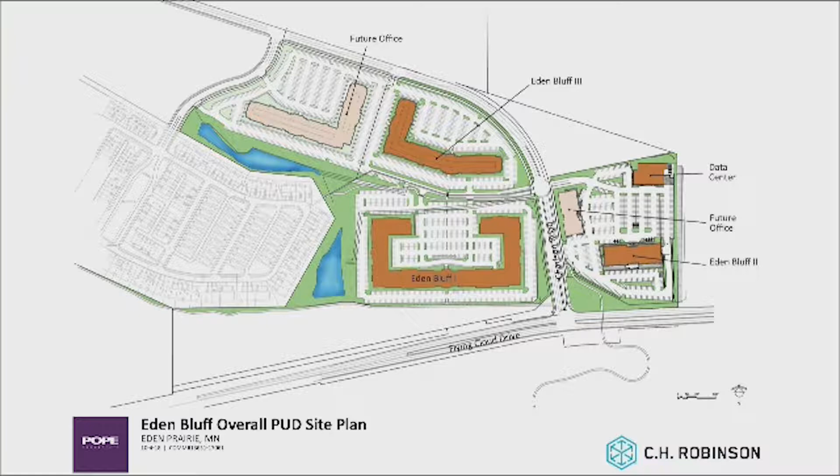Back in 2017, actually in 2016, we were asked by C.H. Robinson to begin the process of looking at that site to see if it would be possible to build surface parking that could support their densification of their existing buildings and ward off the need to build another building.

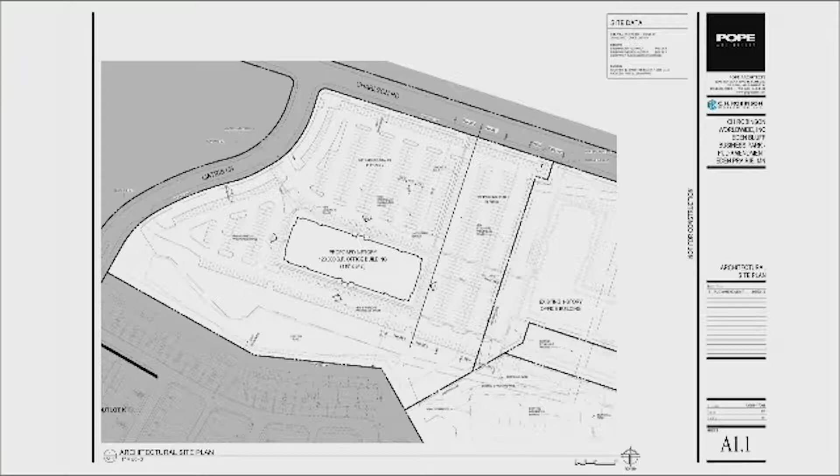In order to accomplish that, we took the 82,000 square foot single-story building and began to stack it. We came back with a plan that would be a 3-story building, about 40,000 square feet, 3 stories high. We took this to a neighborhood meeting and did receive some significant pushback, both on the height of the building as well as concerns about traffic.

And so we went back to the drawing board. Oh, and about that height I mentioned — this is the height of that 3-story building. It was about 42 feet.

We went back and came back with a 2-story building, and that's what we have today that we're seeking approval for. It is an 80,000 square foot 2-story building, expandable in a subsequent phase to 120,000 square feet, adding another 20,000 square feet per floor. It affords the opportunity for C.H. Robinson to build 175 surface parking spaces initially, provided the variance is granted that allows surface parking to be constructed on the lot without the building. And that in turn allows them to forestall the building of the new building, which is the point.

This has been modified both by feedback from the neighborhood and by the results of the traffic study. The traffic study specifically suggested that one of the 2 exits out onto Liatris be eliminated and that the second become right-out only, and we've made that adjustment. It also recommended that the shared drive out into Charlson have 2 exits, one dedicated left turn and one dedicated right turn, and we've added that exit as well. So we're trying to make those traffic modifications in line with the traffic study.

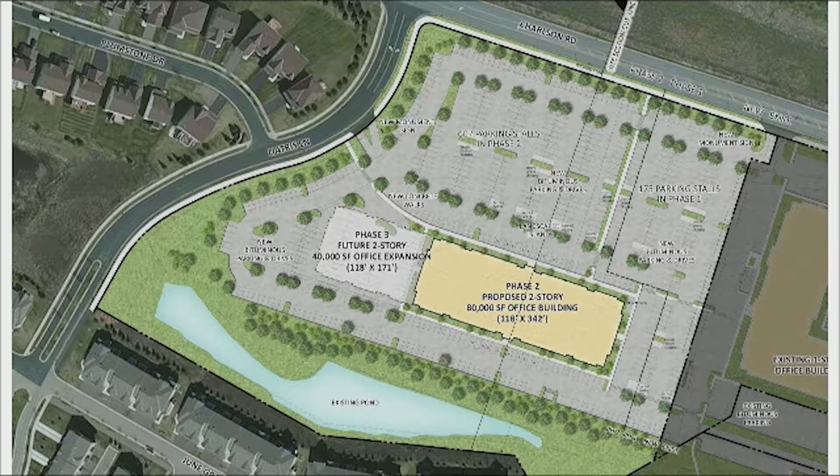After the Planning Commission meeting the other evening, we also went back and added sustainable features to the site, including dedicated carpool parking, dedicated parking for electric cars, and the pedestrian connections that are there as well.

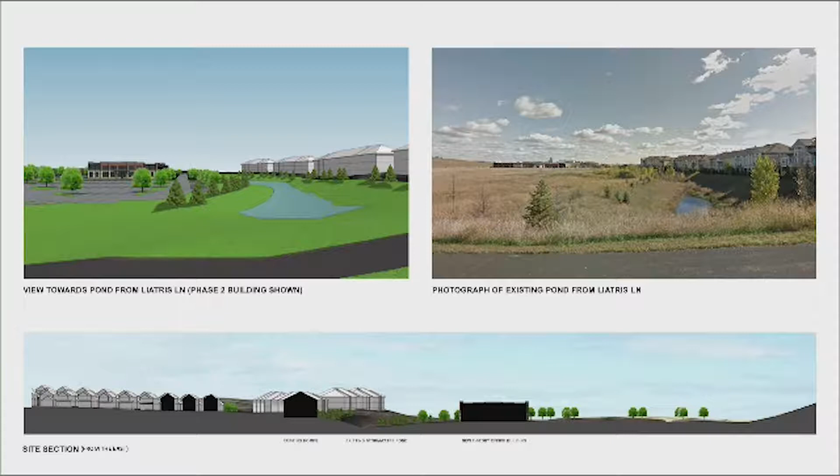So in a single-story configuration, a great deal of roof would have been visible. And in that way, we think there's an advantage here because we're compressing the building area, allowing less view of roof, more view of building, and more view past it as well.

The landscape plan, this is grading and utilities, has been submitted. I won't go into detail on this, but I can answer questions if you have them as we move forward.

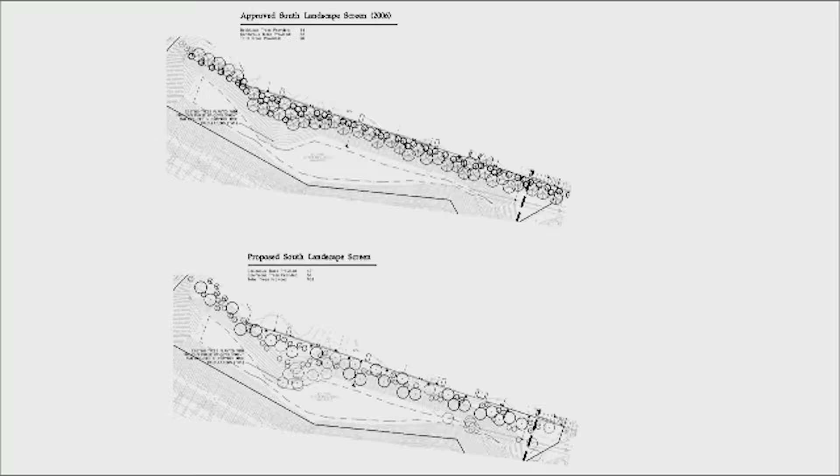This is the planting plan. For the first phase that provides screening from the townhomes, there was a planting plan approved in 2006. Westwood, our civil engineer on this, went in and did a tree inventory to confirm which of those plantings had survived since 2006, and then put together a phase 1 planting plan.

This is the phase 1 parking. It plants a screen around the parking, but also plants screening materials that will have time to grow between now and when that building is eventually built, to provide better screening. So those are happening along the southern border there.

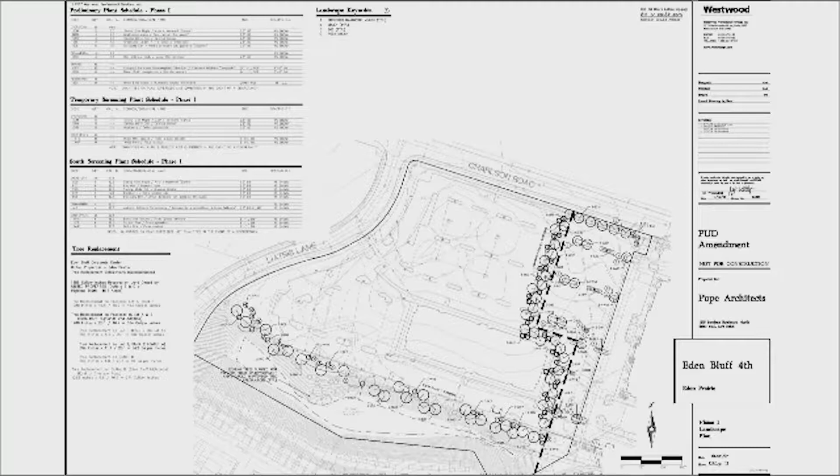As the city report points out, there are more trees being planted than were previously approved and more trees being planted than are required. Part of that strategy is just to ensure survivability, planting a few extra trees in order to make that happen.

Quick question on that: is there a lot of evergreen type trees in there as well? There is, yes. I have specific counts, but they're about half evergreen, I believe, and half deciduous trees. All right, thank you.

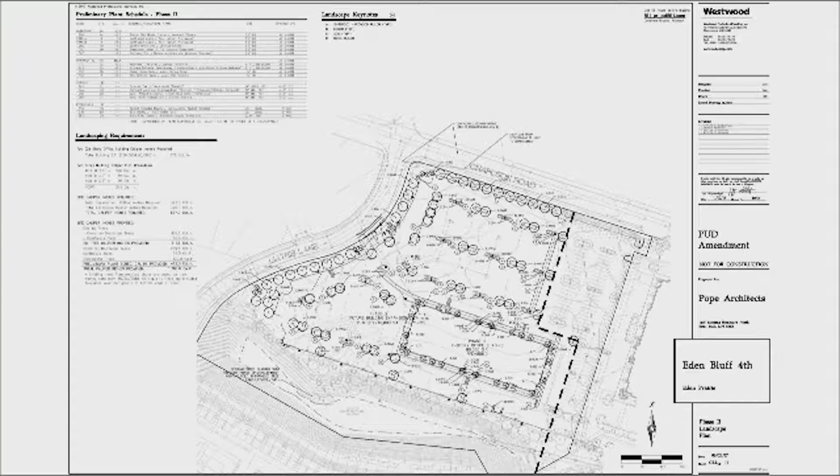This is the phase 2 landscape plan. You see it fills in the trees on all the parking islands and the shrubs, and then creates a screen against Liatris as well.

That's the information we have. I should say that there was considerable conversation about traffic and safety in the Planning Commission meeting, and we had relied on a traffic study.

One of the pushbacks and concerns expressed was that the data for the traffic study was taken in August of 2017, a month when many are on vacation. I talked with the traffic engineer, and they had not made a specific adjustment for that, because this project is not necessarily near a school building, and they would otherwise make that adjustment.

But we don't think it's unreasonable to have to renew the traffic study prior to a building permit being pulled, particularly since that may be years down the road. And there may be things that can reasonably be done in addition to what we're already doing to limit the effect of traffic. So glad to answer any questions you may have.

Any questions? Councilmember Nelson: your main parking lot goes out into Charlson, it looks like, from the overview. Is that correct? There's one exit out onto Liatris and one onto Charlson, and then the other one would go back to the south to the intersection when you first come off Flying Cloud Drive and make a left there off Charlson.

Why not put the access to the parking lots both on Charlson? One is down past the curve and the other would be straight, instead of just going out a few feet from the, I assume there's a stop sign there, maybe there isn't, I didn't drive it. But you wouldn't be that far, and you wouldn't be going onto Liatris, you'd just be going out into Charlson where the cars are going to dump out onto almost immediately anyway.

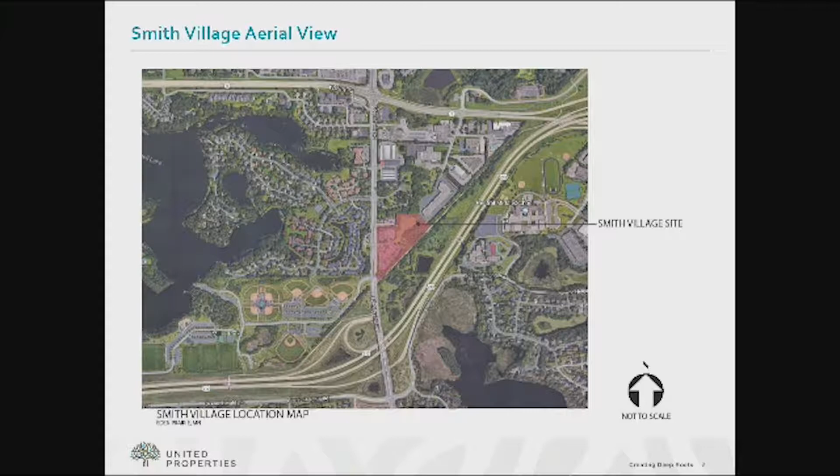So this site is highlighted here in red on the aerial. Just a very well located site that we are excited about because of the regional trail, access to Miller Park, and easy access to both Highway 212 and Highway 5.

As Mr. Getchell said, we are proposing a new neighborhood here at Resurrection Life Church as a redevelopment of both the church site and the vacant lot they currently own. The site plan shows we are creating a new neighborhood with 164 homes. The cooperative is the C-shaped building to the east, the Trail Ridge Apartments are parallel to Eden Prairie Road, and the townhomes are in the middle.

We really believe we are creating a multi-generational situation here with mixed ages. We've got varied product types for sale and rental, with nice broad market appeal for different homes. We're going to range from about 750 square feet up to over 3,200 square feet in the walkout townhomes, and we're proposing a variety of amenities and connectivity to the neighborhood.

Access to this entire new neighborhood would be off of Glory Lane, a private road off of Eden Prairie Road, currently between Resurrection Church and Huber Funeral Home. I'll walk through a few more details of each component that were a little more easily seen on the overhead.

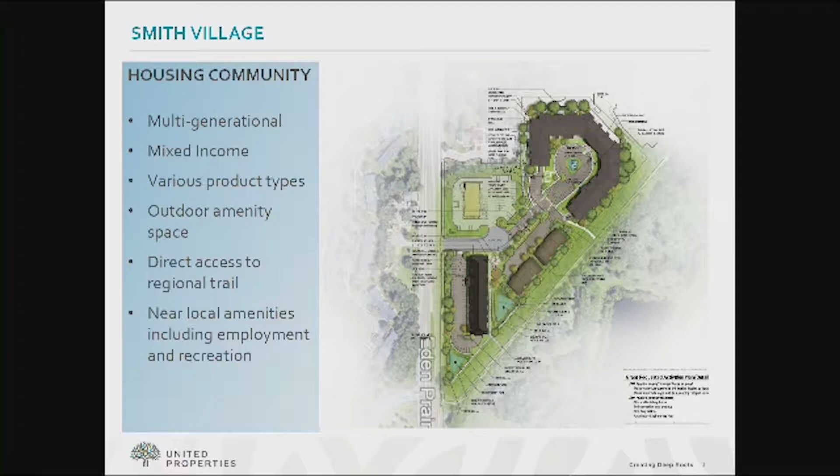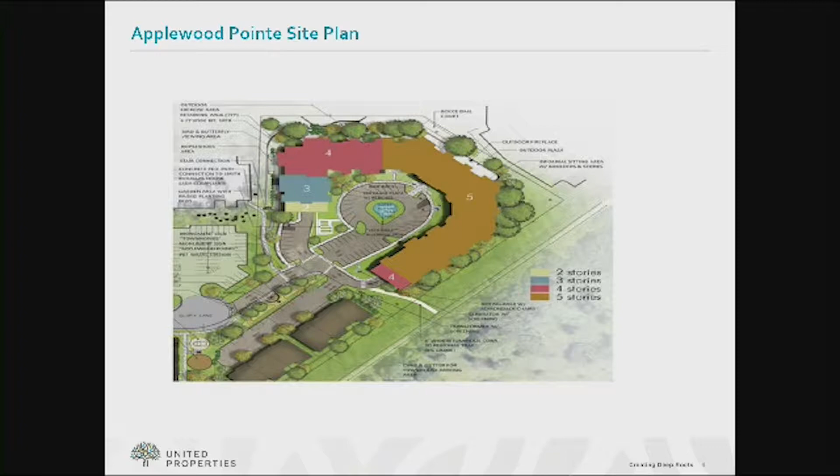We've got garden areas, a little water feature in front, and many common areas on the site. The next slide here is just a view of that tiered view at the entry.

On the left-hand side, the building steps up from 2 and 3 to 4 and 5 stories on the elevation. The cooperative has 100 homes, and we are proposing that 10 of those, or 10%, will qualify for varying area median income qualifications. The homes will range from about 1,100 to over 1,900 square feet, all 2 bedrooms, with most having an additional den. As Mr. Getchell said, it's a senior 62-and-older independent cooperative, with an average age likely close to 70.

The next photo is a rendering of that short section, a view from the Smith House parking lot. We will be adding plenty of vegetation in addition to tiering the building there to limit visibility.

Is this existing vegetation? No, this will be proposed. There are some trees there that we can save, but most of it will have to be new planted.

So what size trees are you planting? If we're able to put in spade-dug trees, about 12 to 16 feet, that's what we'll try to do. We may come back to staff and work potentially to do that on some of the parking buffer between our lot line and the parking lots, so some might come onto the Smith property, just because of the slopes there. Smith is actually up higher than our site, so we have to deal with some grades. But we're happy to do as much screening as we're able.

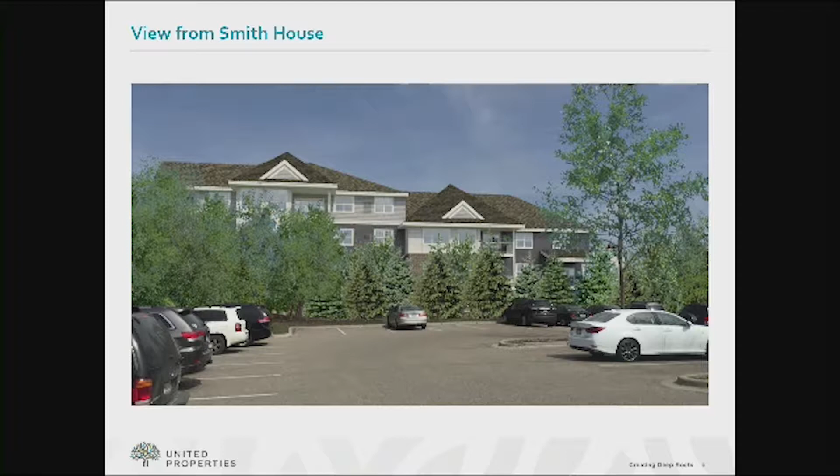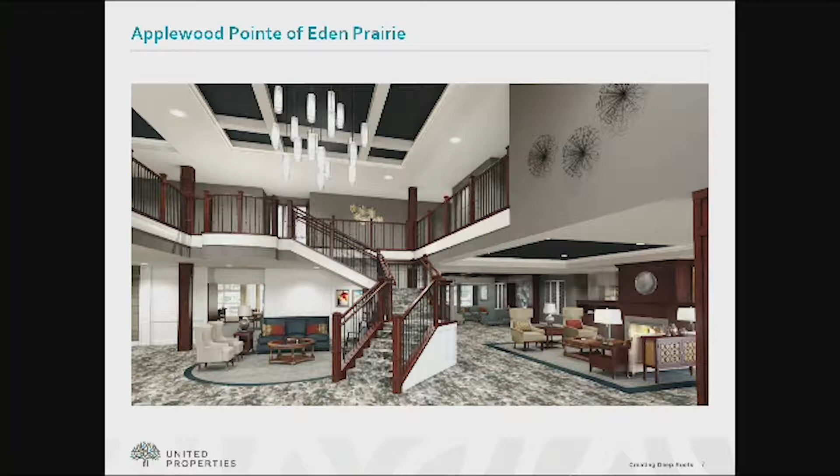The next slide is a quick shot of a potential interior, showing that the cooperative has a very broad range of amenities within the building. This is our two-story lobby, with a great room, a parlor, a club room, fitness center, library, both crafts and hobby shops, and a car wash in the garage.

The next slide takes a closer look at the remaining part of the site, where the 6 townhomes and 58 apartments are, with access off of Glory Lane. We've combined a lot of the green area and entry features in the center, sharing a public space with public art, a sitting area, and a green rain garden area. You'll see a play area and sport court adjacent to the Trail Ridge apartments, and a secondary access from that building to that area, away from the parking, with connectivity both within the site and to the proposed regional trail.

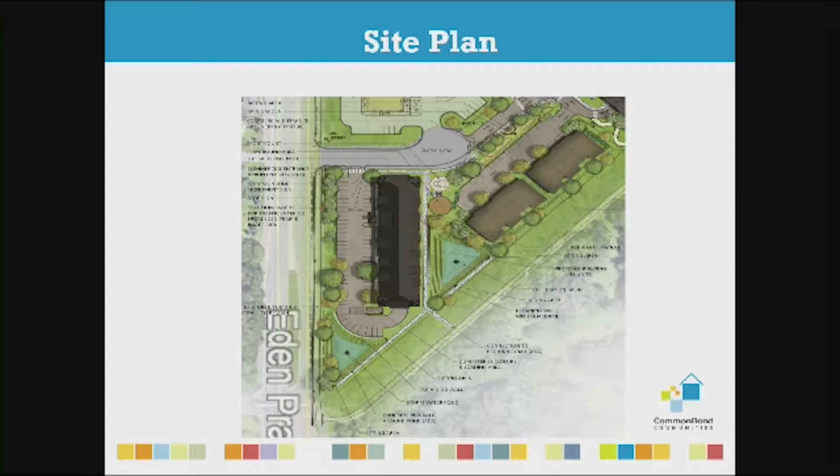A few ideas about what those items might look like are here, anywhere from raised garden areas to public art and playgrounds and activities that we will be adding across the entire site combined.

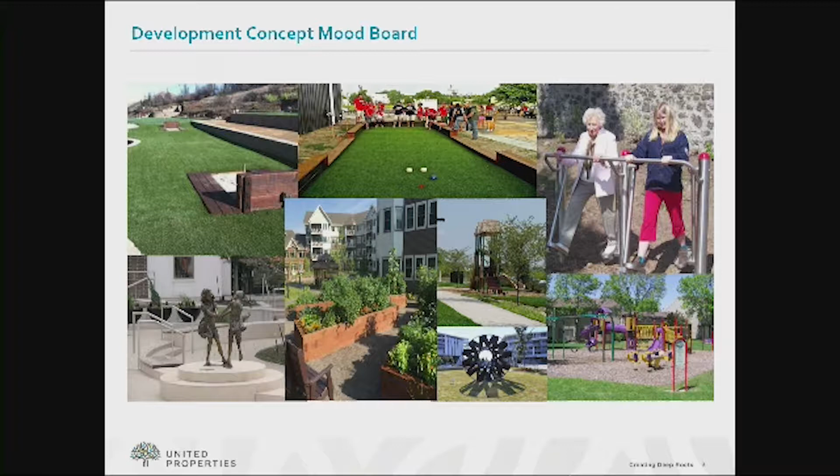So those are not determined? None of that is determined yet? You just plan to maybe do something like that? No, quite a few of these things are determined. We are planning on having an area with public art, we do have the raised gardens, and we will have a playground area. Some of the activities, whether it's bocce ball or other athletic facilities around the cooperative, are still to be determined. Okay, correct. Thank you.

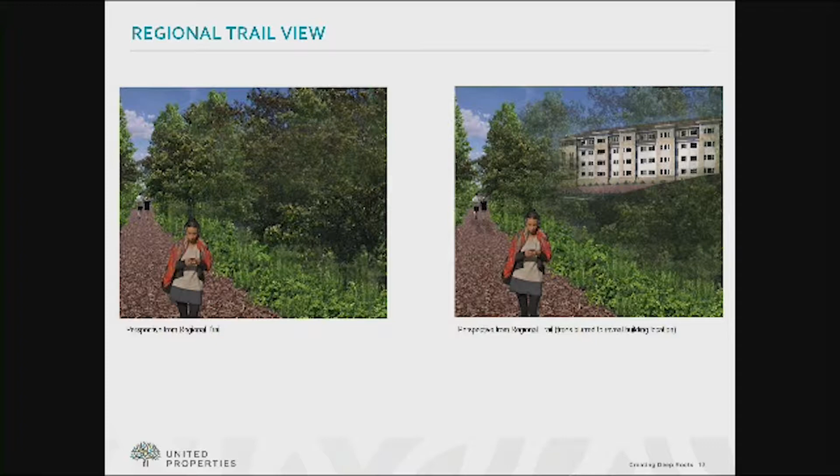The next slide addresses some concern raised during the planning process about views from the trail, the actual trail experience. We have about 50 feet between our property line and the actual trail, which is all treed and vegetated right now and will not be disturbed. There's an additional 25 to 30 feet or so to the buildings. This was just trying to show that most everything you're going to see is going to be behind the existing vegetation, so we feel the buildings will have very little impact on the trail experience.

The next slide is the 4-story Trail Point Ridge building, with 58 homes, 6 of those at market rate. It's a varied 1, 2, and 3 bedroom facility, and 52 of those homes will meet area median income requirements at 60% or less. Sizes range from approximately 750 square feet to a little over 1,250 square feet, with expected rents around $700 up to $1,325 per month.

CommonBond will own and manage this property. We're very pleased to have them as a partner here as part of our redevelopment. They've been in business since 1971, do a great job with supportive services, and currently serve thousands of residents in 3 states surrounding Minnesota here.

Their site is to the south. Their site is actually helping share some of the stormwater with us overall, and this building does have a full underground garage, again to limit the amount of asphalt and paving on the site.

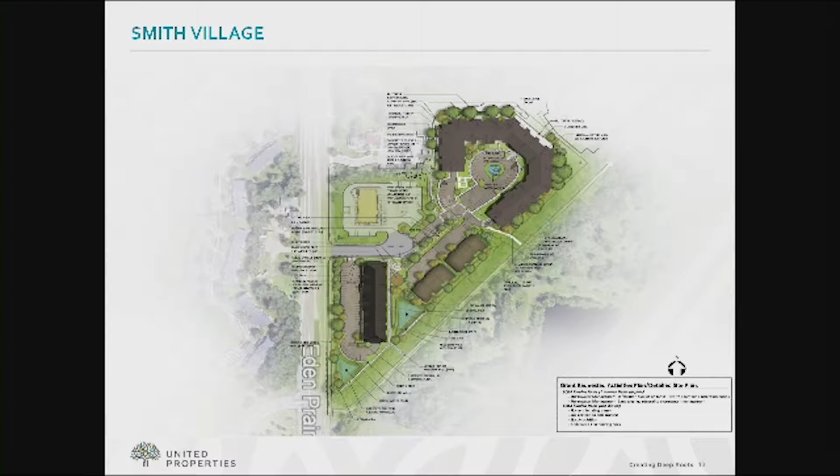Well, we are going to do our best. The overhead I showed was more at the corner along Eden Prairie Road versus Glory Lane directly, but Glory Lane we are reconfiguring a little bit. It's a private road that's been there for a while, so we will update the sidewalk or the curb and add a sidewalk and whatever landscaping we can do.

The essence of that setback request is really due to the shared stormwater and access to the underground garage we're providing, which is somewhat unique. We have members from CommonBond here if you'd rather have them address this, but it's unique for workforce apartments to have underground parking — typically they're all surface parking — so part of our development process has been to figure out how to make that additional cost work for them.

I maybe didn't make my question clear. I'm asking what you're going to do to mitigate the impact of a four-story wall. We'll try to put in as big of trees as we can, if that's what you're asking.

So there are trees on the landscape plan. There are so many pieces to this that it's hard to get through. I sure hope so. Well, and if they're not, we can commit to doing that.

This was another one of my concerns — this is going to be a big change in that area, at the Smith-Douglas-More House, from having a site that is really pretty pristine and quiet once you get away from Eden Prairie Road. It's a beautiful site, and now there's going to be a 3-story section of this building behind it.

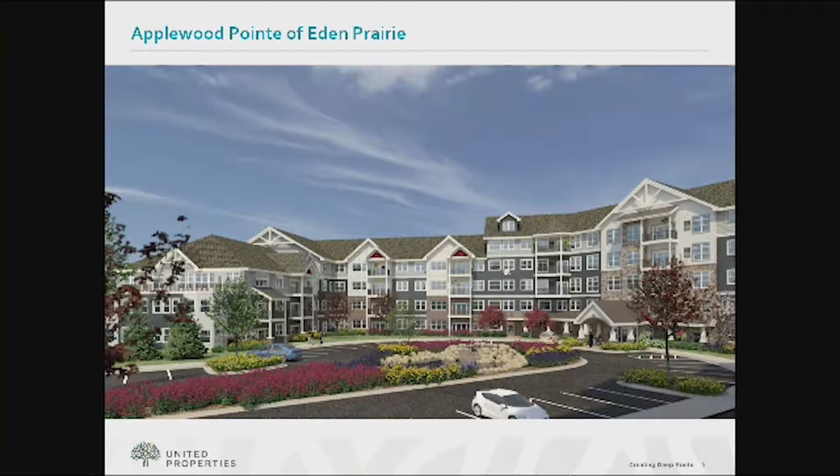Okay, now where does this red stuff go on that? Because it doesn't look red. That is the red Hardie board vertical siding found in the gables. Oh, just in those little gable things. We'll probably continue to develop that a little bit more.

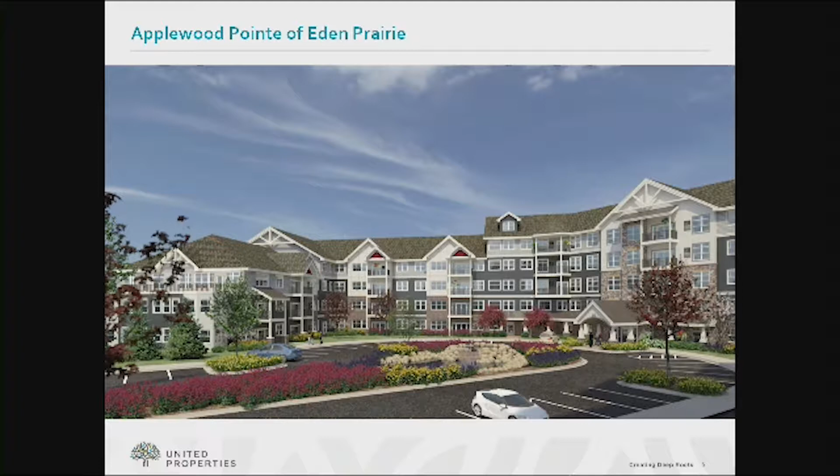Where does the brick stuff go then? You will see it is basically from the entryway, the covered entry, basically the first floor to the left, and then there's a two-story section. There are accent pieces, that's all stone.

The cursor is on the dark color that goes over from that brick. Was that a dark brown or a dark red? That is the dark gray colored Hardie siding that we're referring to. Maybe I didn't see that.

I'm not sure if my cursor shows on your screen. It shows, it does, yep. So this is the cultured stone material designating the front entryway. This is the gray lap siding you're referring to. This is basically the top around the building, the cobblestone shake. Did you guys see that?

And then this is the brick. There are brick accents located all around the building, many of the bump outs. That's the red then. Do you have a sample of that cobblestone shake? I think that was the white Hardie board siding.

So you've got like 8 colors going on here? We have 3 primary colors: 2 different bricks, the white trim on the windows, the gray, the red, the green. So the darker stuff is the gold, the medium stuff is the red. Okay, so it is going to be a different look than this.

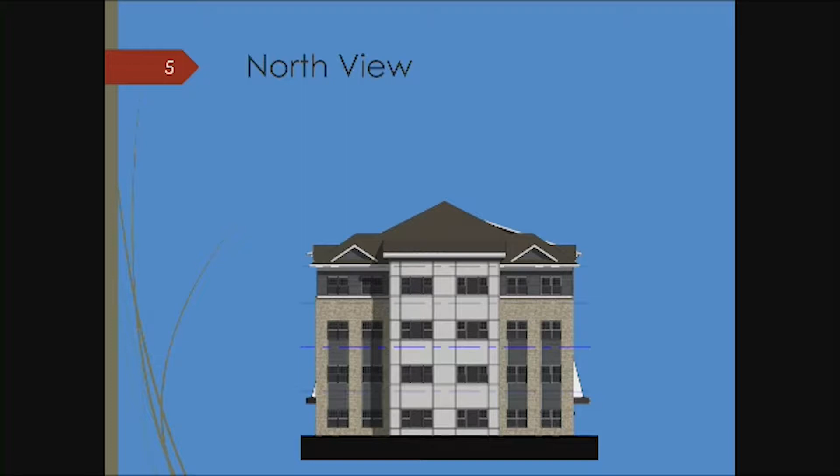Now I'm really, really concerned about the white, because if you're down at Kowalski's and looking up the road a block or so, you're going to see it - your eye is naturally drawn to white, and it's the most obvious color you can see. I'm also concerned about the dark, I guess it's blue, around the top there right under the roof - that looks very dark to me, and I'll mention why that's problematic. This is the west view, which people would have to drive by.

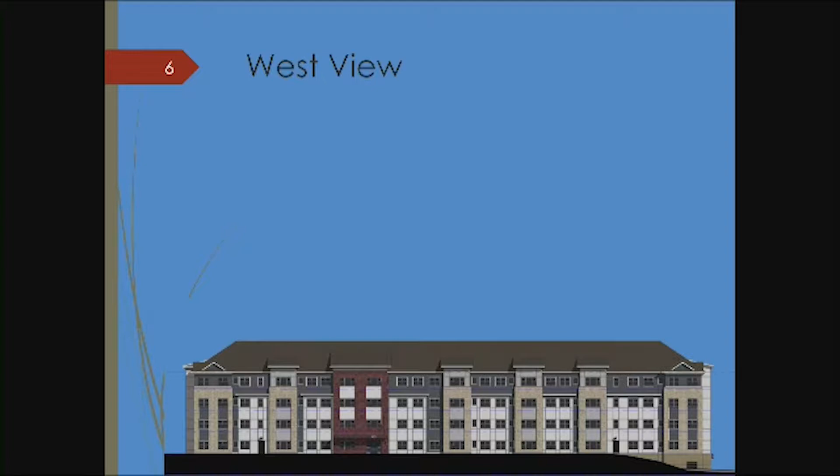So I'll talk a little bit about that, but you get a picket fence feature if you go by this white, brown color scheme as you drive by - it's not a good way to go. This is very much out of line with most of the other buildings in town, which do not have a color scheme like this.

Now that light color, just for a little commercial here, is the color of the earth. I went out to a construction site and took a picture of the earth color - there were two colors out there: dark or wet earth, and dry earth. This is actually the color of dry earth in Eden Prairie, and it's also very close to the color of Chaska brick.

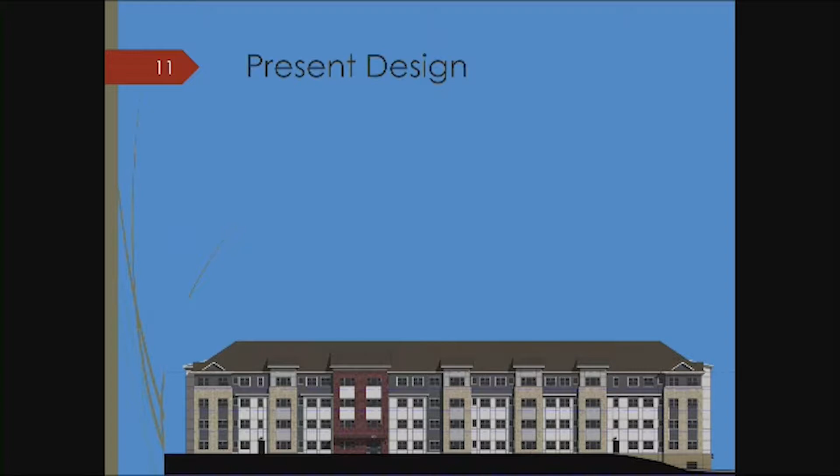Now here's the present design for the west view. Again, you can see the dark color on top and white over there. This would be the natural beauty color scheme. So as far as what I would do in a class on architecture, I would change all that busyness with all those different colors - I would only use two colors basically on this building.

Now, what is a natural color scheme? Natural means something that is not easily seen or noticed, and it conforms with nature. Natural color schemes also reference sky color and complementary colors to sky color. To keep Eden Prairie natural - like I love when I go to Eden Prairie Road, it's a natural road - I really don't want to see these new buildings stand out from nature and the environment. I'm very concerned about the use of white in these buildings, because your eye is drawn to white, and if you have a dark color next to it, all you see is the white.

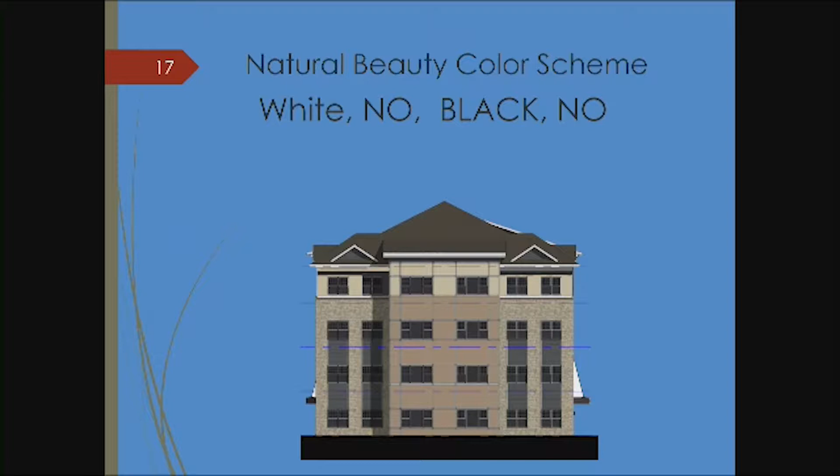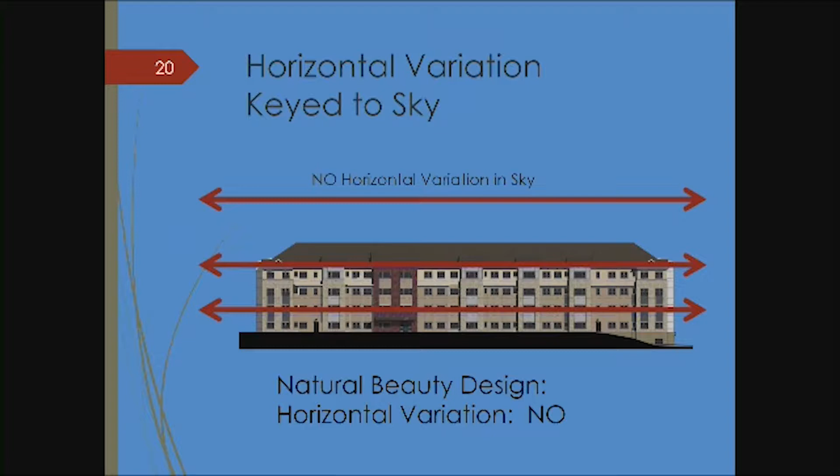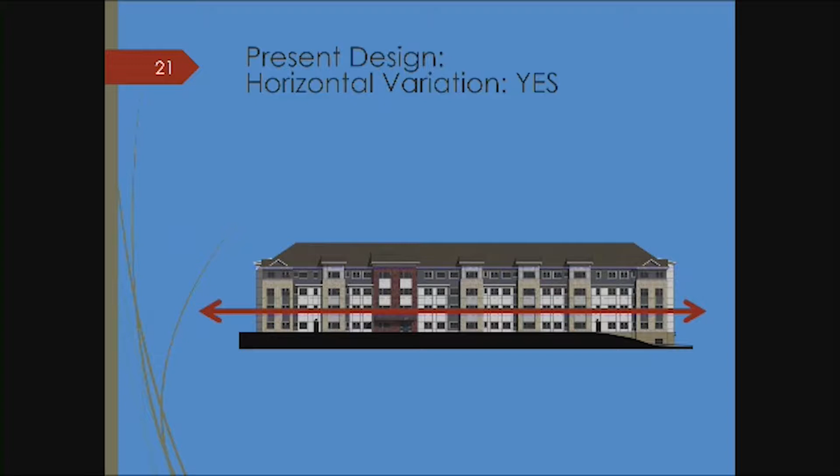Horizontal variation - you want no horizontal variation. How you determine this is that the sky has no horizontal variation, so in a building, what would be taught in architecture is you don't want the building to have any horizontal variation either. You can see the two arrows I put down there. If you have a situation like this, you've got lots of horizontal variation, and if you're driving by a building like this, you get the picket fence effect - you see color, different color, color, different color. White on this building, I'm sure, would attract the eye, and this would cause traffic accidents along Eden Prairie Road, I'm sure of it.

Now, vertical variation is okay. Then you want complementary colors to the sky, and you want a simple color scheme - simple color scheme means one or two colors, so you want that to be yes.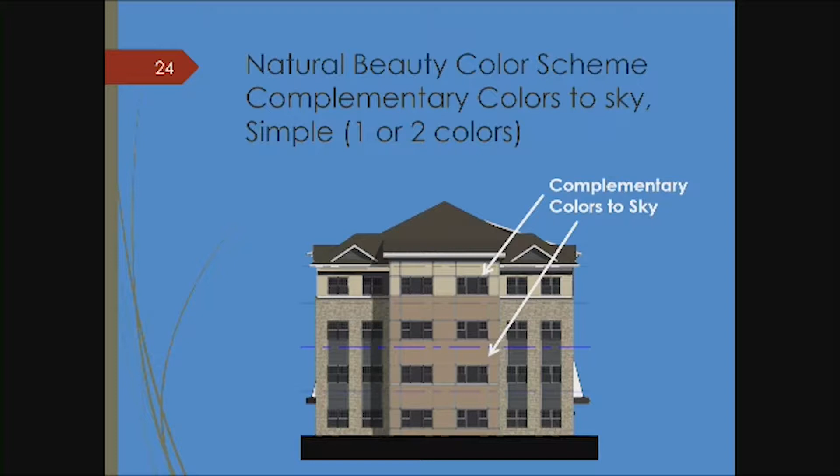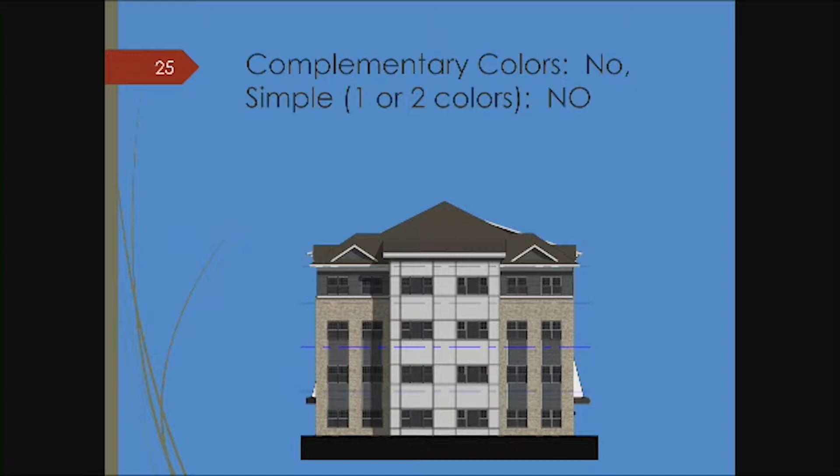The natural color scheme uses complementary colors to the sky - you see I've put blue here. These two sections that I have are complementary colors. This is the situation with their building - there are no complementary colors. You've got white, you've got that dark blue there. So to score it, I give the present design a score of 25%. You can see all those red yeses up there, and the only two that match are shown there.

So the white on this building is a big attention grabber. A natural building is not easily seen or noticed, and this will be very easily seen and noticed.

Thank you, sir, you're way over your time. Okay, I'm going to have to cut you off.

The other building is 100% score, like I've shown it there. Thank you. It's a 100-year decision, so I hope you make the right plan. Is there anybody else that wants to address the council on this proposal?

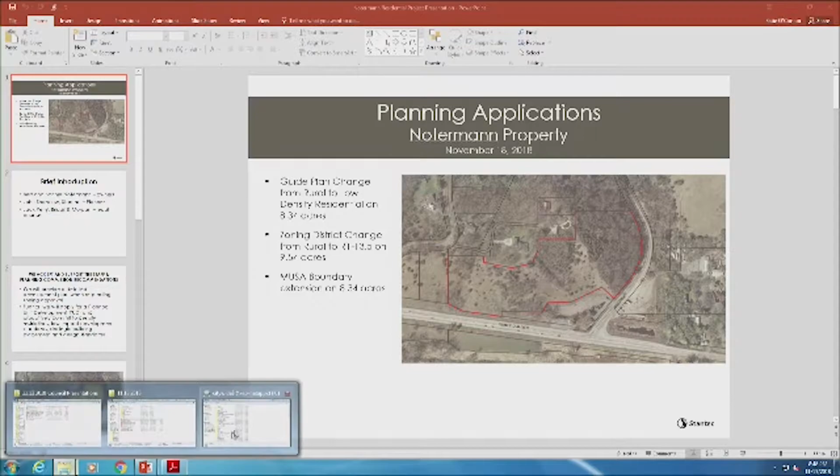Mr. Hanson, just for a point of discussion, Mr. Hanson and I met yesterday afternoon, and he had a much more extensive presentation that he gave me about what he was thinking. But what he didn't have yesterday was a picture of that Common Bond building with the changed color scheme. I have to admit, I was skeptical yesterday. Now that I see the change in getting rid of the white, I think it is a much more attractive building.

I'm concerned about that 4-story building right on Eden Prairie Road. It's quite a change from anything that we have. Elam Shores is set way back. Applewood Point is going to be set way back. This is very close to the road. I think it is important that we give some consideration to the visual impact of that. And I agree, the white needs to go.

Yeah, I also sat through it, and when you see what the colors were last spring, that had been changed, so it wasn't horizontal. Is there any room for still some discussion of, not just straight white, but a light tan or some color reconsiderations? I know it's changed once, and how hard and fast are we set with these colors?

You can certainly ask the applicant's point of view, and as you know, we have time between first and second reading. It might be nice to change the looks of it a little bit.

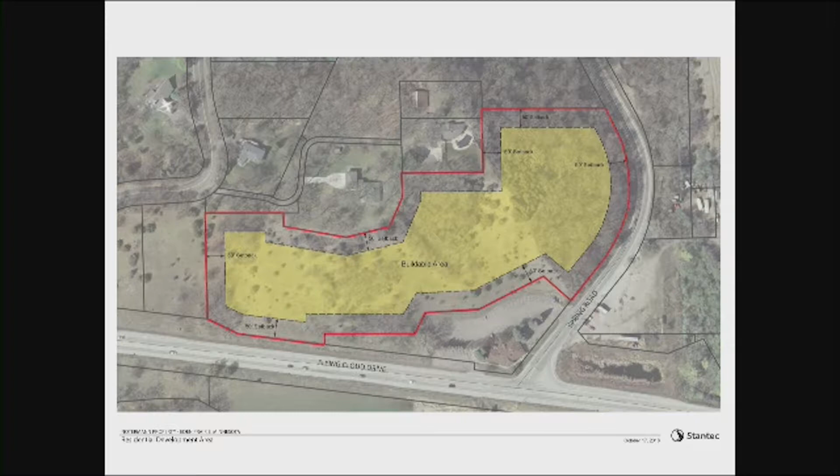This is just showing the building envelope that's there if you meet all the various setbacks. We think there are clearly some parts of the site that should remain undeveloped, in particular the far northeast portion with the steep slopes and the trees. So we'll be working to find other locations to put the buildings.

Very briefly, the Notermans have owned the property since the 1970s. It's always been their intention to develop it when utilities were available. They've always been in consultation with the city and understood that when utilities eventually got there, they would be available to assist them in developing their property. The rural residential district speaks to the idea of holding the property until utilities are available so the land can be developed with public utilities.

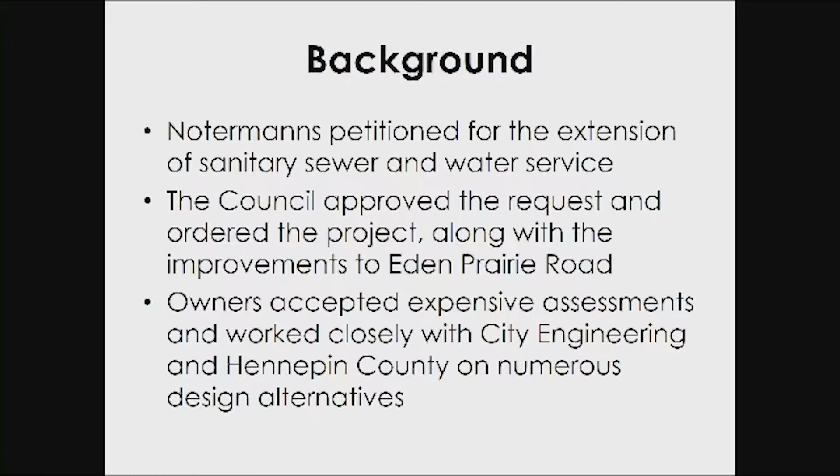The Notermans did petition for the extension of sanitary sewer, which was granted by the city. They have accepted assessments, which would be very expensive, to extend utilities down there. We worked very closely with city staff to make sure there were sleeves underneath the new road to serve those lots, so they won't have to have on-site drain fields. They'll be able to be developed with sanitary sewer.

So in summary, they're making a major commitment to remain in the city of Eden Prairie. We will propose a reasonable number of lots. We'll begin as soon as possible working closely with staff about that. The building heights will not be visible above the slope, and we'll make sure we place the units in such a way that they don't block anybody's view. Happy to answer any questions.

Any questions for Mr. Shardlow? Okay, thank you. This is a public hearing. Is there anyone from the audience that wants to address the council? Yes.

Good evening, Madam Mayor and members of the council. My name is Dean Edstrom. My wife and I have lived at 10133 Eden Prairie Road for the past 45 years. Our property abuts the proposed development property on the northwest and the west.

Before I get into it, I'd like to say a couple of words. Congratulations and thank you to Brad Aho, Kathy Nelson, and Ron Case for the wonderful, dignified campaigns they ran, as the mayor suggested at the beginning of the meeting. It's a real credit to Eden Prairie to see this kind of campaign at a time when so much of politics is really not so good. I'd also like to thank and congratulate Mayor Tyra-Lukens, and in absentia, Sherry Butcher-Wickstrom, for their service over these years. I was on the city council myself over 3.5 decades ago, if you can imagine that, and I know personally the amount of time and dedication it takes to serve on the council. I thank you for that service over the years.

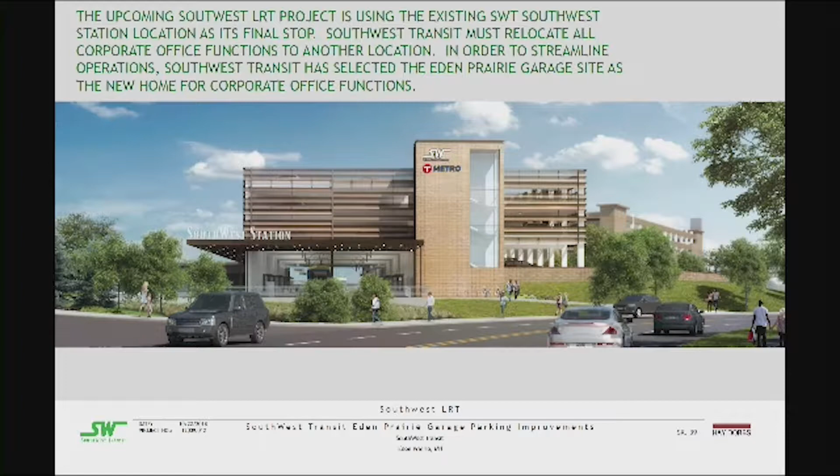Part of what will happen is that we looked around the area to relocate the site for the corporate offices. It was determined after quite a bit of study that the most efficient operational way to relocate staff was to move the staff to the bus garage. Consolidating staff creates a great deal of operational efficiencies on the site.

One of the things about that when we were starting to do our site analysis was that over time, since Southwest Transit moved into that building back in the mid-90s, their service has grown. They've added services like Prime, and they've added a significant number of events to their service and to the regional transportation services that they support.

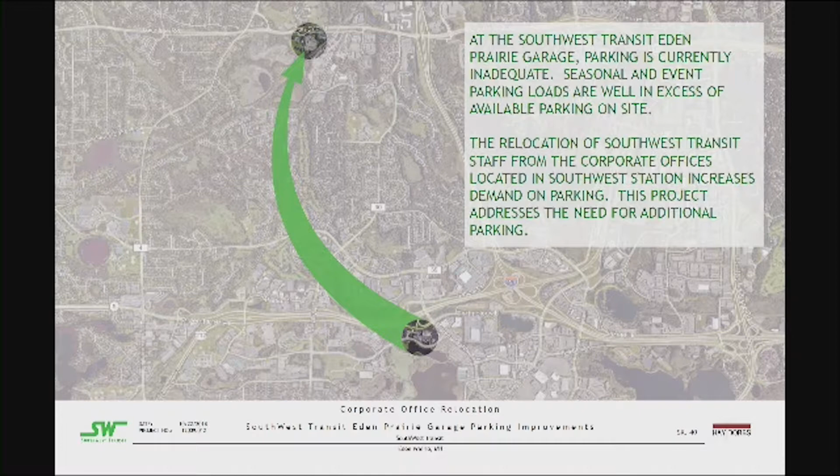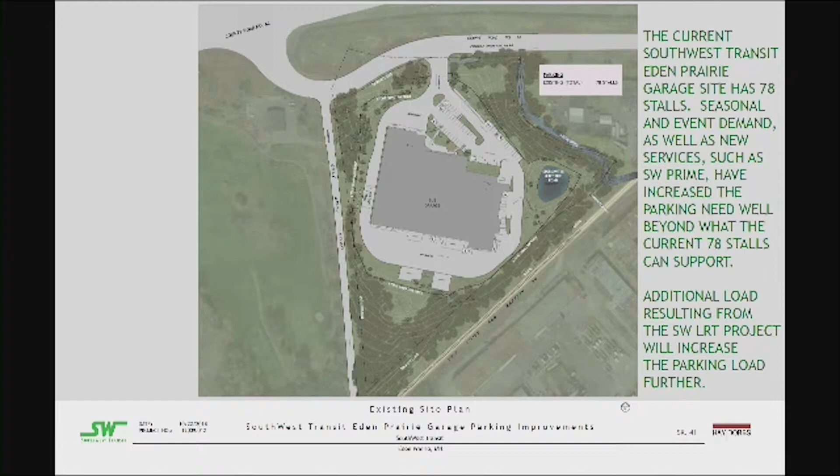Today, it's the same site, just over 10 acres. There's 78 parking stalls on the site today, and we've got impervious surface coverage—all the parking areas and building areas—of about 47.97% of the site. There's about 100,000 square feet of building space, comprised of bus storage facilities, maintenance facilities, and a very small office component.

As we started to look at the need for parking, just for the number of drivers alone, we needed 80 spaces for regular drivers. There's 13 maintenance staff on the site today. When we move the corporate office staff, there will be a total of 10 corporate staff on the site, 5 supervisors, 2 IT staff, and 5 visitor parking spaces, for a total of 115. That puts us above the 78 that's there today.

People find spaces, as you know—in situations wherever you can park, you park. What it does is create on-site operational and safety issues with people traversing across the site, and then you've got bus movements as well. So it's a very complicated site.

And then depending on the events, we might have 25 to 72 additional drivers between the state fair or other different facilities. To accommodate the additional parking, we're really looking at repurposing the existing site.

We're taking old loading dock space and converting that into parking spaces. We're reconfiguring the parking on the north side of the building to make it a little more rational and increase the number of spaces. Up in the north end of the site, we're basically adding a double-loaded parking stall along the edge.

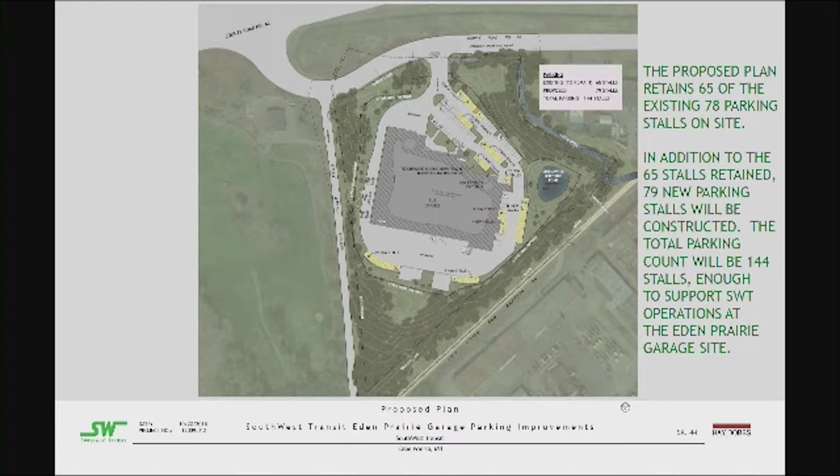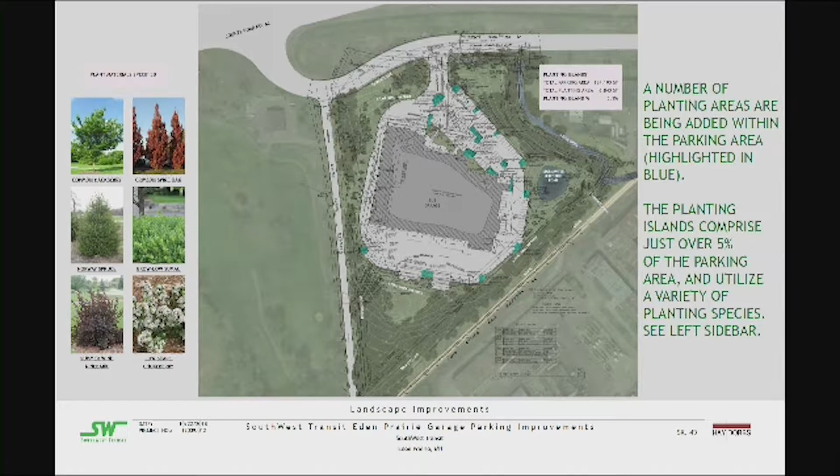Today, the site does not meet the percentage of island requirements, and through this reconfiguration we're adding more islands, just over the required 5% of parking space as islands. Along with that, significant new plantings in terms of trees and the variety of plant materials within those islands will be included.

We're reconfiguring the lighting on the site, where the lighting today exceeds the allowable lumens at the property line. That's being changed to be within the limits of the site. So all in all, it's a simple project.

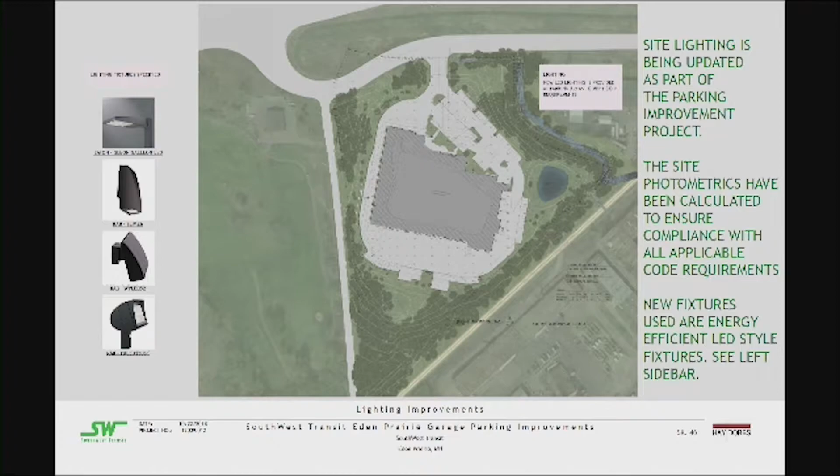So with that, if you have any questions, we want to thank you for your time and consideration of this project. Thank you. Any questions?

I'm sure, Brad, you've had your questions answered. Yes. Being chair of Southwest Transit, we've looked at this in great detail, and it is very necessary and needed for the operations of the service. So we appreciate the consideration.

Kathy, do you have any questions? No, it looks well thought out.

Okay, thank you. This is a public hearing. Is there anyone from the audience that wants to address the council on this? Seeing none, I would close the public hearing and approve the first reading of the ordinance for planned unit development district review with waivers on 10.05 acres and direct staff to prepare a development agreement incorporating staff and commission recommendations and council conditions.

Second. All in favor? Aye. Aye. Motion passes. Code amendment, 9F.

Mr. Getchell: Thank you, Mayor. Yes, our last public hearing. The City Council, through workshops this past year, discussed zoning issues related to sexually oriented businesses and pawn shops. It led to a moratorium that the council passed this past summer to study zoning issues related to these uses.

We thought we'd possibly bring both of these back for a first reading, but as discussed as recently as tonight's workshop, we have more work to do on the pawn shop piece. So for the sake of time, I won't go into covering that piece because we're not requesting that you take action on it tonight.

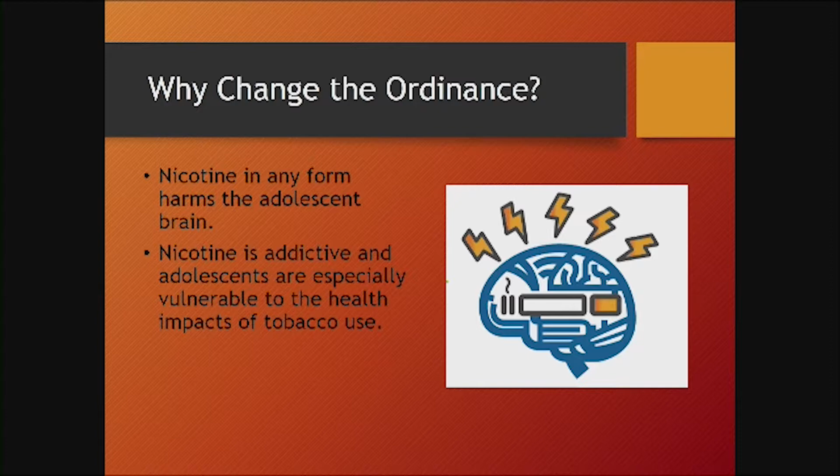Nicotine in any form harms the adolescent brain, we know this. Nicotine is addictive, and adolescents are especially vulnerable to the health impacts of tobacco use. There's broad support for raising the tobacco sales age. I think you can see by the folks that are here this evening in support of this. A national survey shows that 75% of adults favor increasing the tobacco minimum sales age to 21. Even 70% of smokers are in support of raising that minimum legal age.

We did meet on October 30th with some representatives from Safeway Minnesota and also retailers that came in and shared some of their concerns with what this might look like for their business. A couple examples: someone said the point of sale software they're currently using would need to be adjusted when scanning an ID to make that sale. There was also discussion around the competitive disadvantage these retailers may experience compared to other communities. With that, I'd share that here in Eden Prairie, we have 23 licensed establishments.